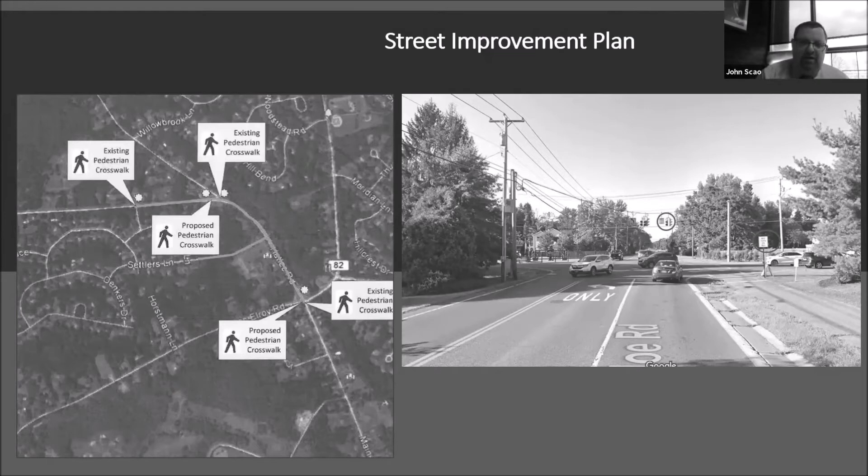This other image I want to show, because as a community—and many of the smaller communities have state or county routes going through their communities—I would encourage the CDTC linkage program for any community with a high visibility state or county route to look at a corridor study for opportunities to improve crosswalk, pedestrian, and bicycle safety. This is an example from when we did the Exit 9 corridor study, funded by CDTC.

We noted, and it was reinforced by our Highway Safety Committee, the needs of this intersection. The photo in the upper left shows that in 2007 we only had one crosswalk on the west side of Route 146 from Moe Road on the approach.

We were proposing a future sidewalk on the opposite side and crosswalks on both intersections, since there's a sidewalk that runs along Route 146. We also have funding for a new sidewalk on the north side of 146. At the time, we only had call buttons, and I don't think people realized these actually cycled the signal for them to cross. You have loop detectors in the pavement, but unless a car is there tripping the detector, it would never cycle through to allow a pedestrian to cross.

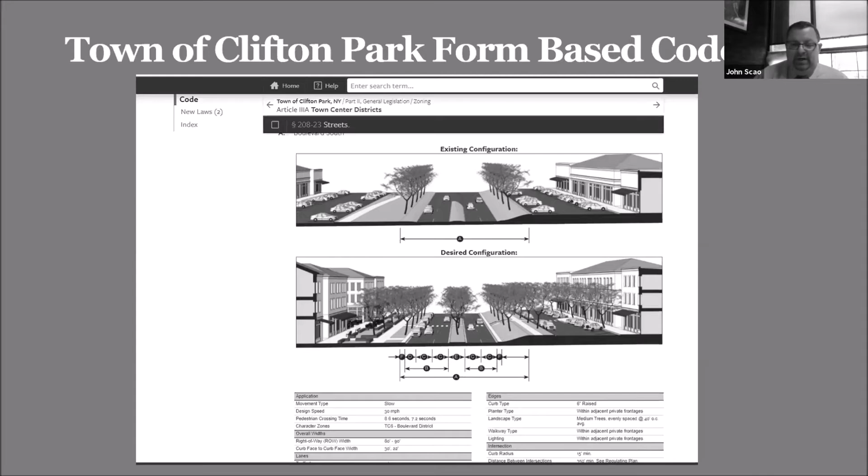This is an example of Clifton Park Center Road, Clifton Country Road South, with the street design elements right in our code. I'll show two examples of recent projects. This is a mixed-use building with 38 residential units and storefronts on the first floor. And here's a headline right out of the Gazette: ADA compliant sidewalks, crosswalks to be installed along a stretch of Clifton Country Road. This is while it was under construction.

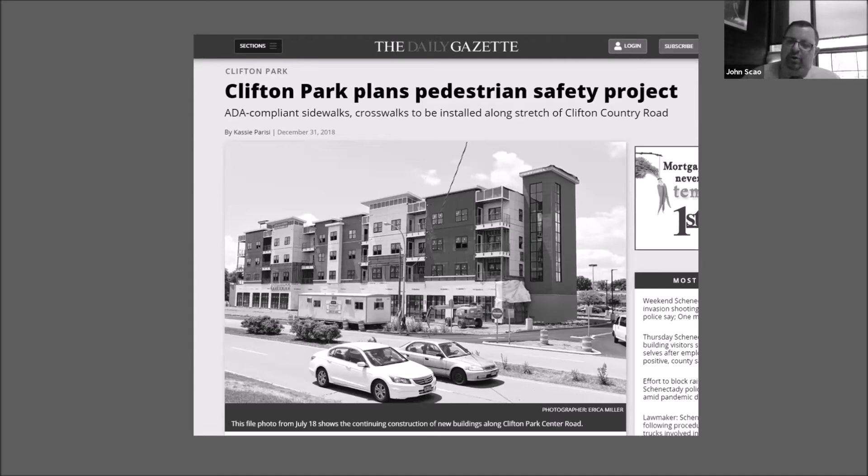That boulevard theme I just showed from our town code is this street section, and this is the finished product. Both businesses are open. This is new construction, and you can see how we connect it.

This is pre-COVID, showing the desire for outdoor dining areas, two sidewalks, and for the first time in Clifton Park, parallel on-street parking spaces that work very well. Many of these businesses now use the parallel parking spaces for curbside pickup, where you text that you've arrived and they bring the food out to you. When we planned this, it was never with the current situation in mind, but this area was able to adapt and transition well to the issues we're all facing.

Visible bike racks are something we require with every commercial project, placed in a visible location from the streetscape. Cyclists will start coming to these locations as part of a destination. I took this from the street view because it reminds drivers too, if it's in a visible location and not back behind the business, that there are cyclists and pedestrians in the corridor.

This is another project that just received approval two months ago in Clifton Park, similar to what was actually built. It should go to construction this winter, with additional parallel parking spaces and additional residential with commercial use on the first floor. It's an infill development project where there are three existing office buildings, 30-plus years old, that were set back. We're retrofitting with infill residential development on an existing commercial site.

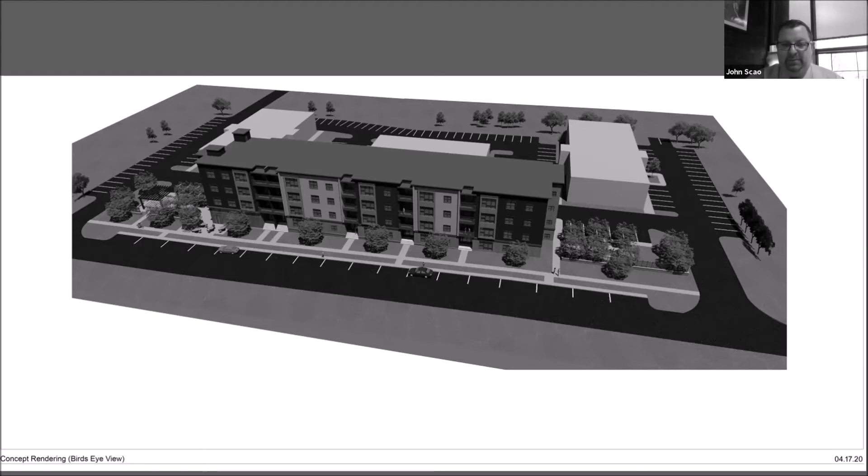It's not an all-or-nothing situation. People would say, well, you're infilling, but you're leaving three 30-plus-year-old buildings behind. It allows revenues to be generated that will allow for adaptive reuse of those commercial office buildings behind. Then when they become obsolete, redevelopment can occur over the next decade or two, in more compliance with our form-based code as time goes on. So these are incremental street-level changes.

This is a project currently in front of us, which will be back before our planning board on November 10th within our town center. This shows, on the private sector side, how we tie in commercial sidewalks into our street network and make connections to proposed restaurants. Here's a 12,000 square foot restaurant facility with 1.5 acres of outdoor dining being proposed right now. It's a great use that we think will complement our town center, and we're looking forward to working with the applicant to get this to construction in the near future.

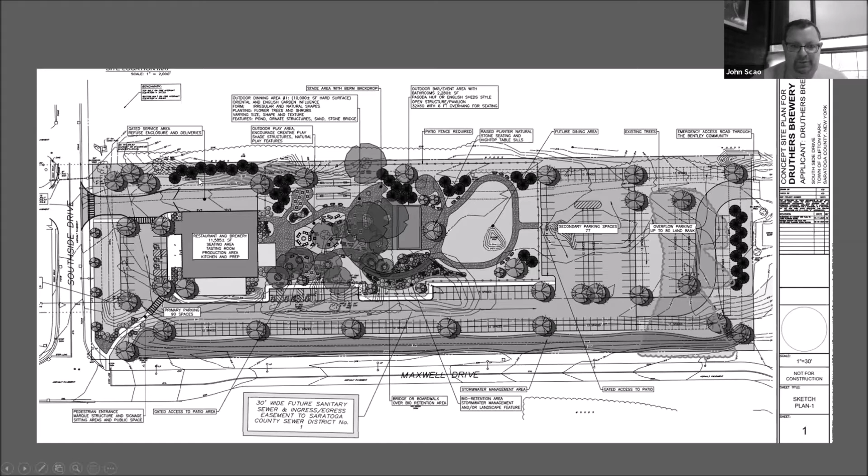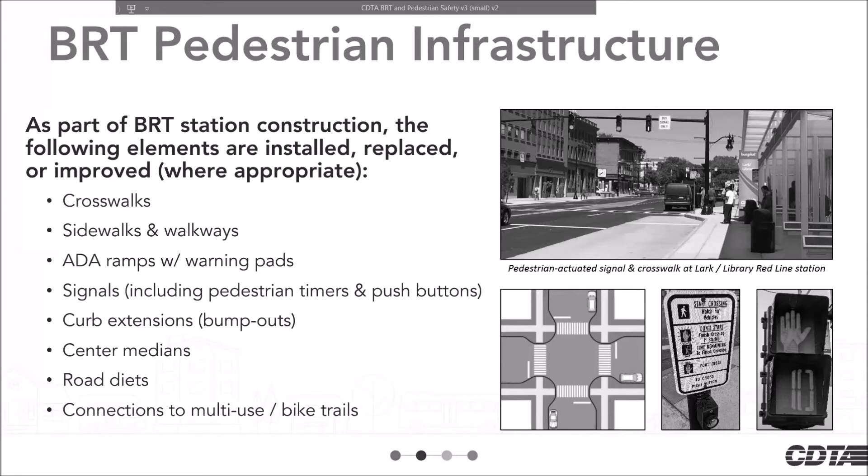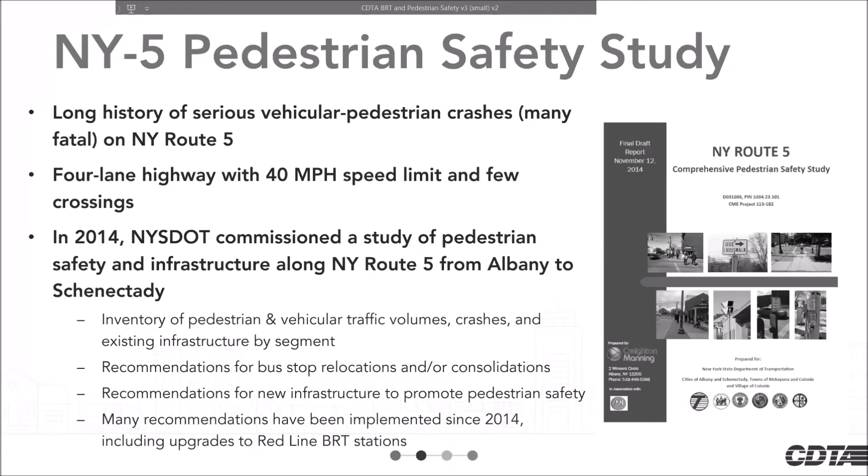One good example of the partnership from beginning to end is what happened with the New York 5 pedestrian safety study. CDTA was part of that study, a key stakeholder throughout its creation, and it came up with a number of different improvements that could happen on New York Route 5. For transit, some were as simple as moving bus stops that were mid-block at unsignalized intersections up to signalized intersections, but other things were more involved, and I'll give two examples.

The first was our major station next to Colonie Center. This is on the Red Line, a major location for ridership but also for transfers. There was a very difficult situation with a high volume roadway for traffic, also being the point where there were a number of pedestrians crossing the roadway.

So as part of the study, DOT actually constructed a center median, which restricted some turn movements but also provided the opportunity for pedestrians to cross the roadway two lanes at a time. If you're only paying attention to traffic in one direction without significant turning movements, and the roadway you're crossing is narrower, it becomes safer. So that's an example where the planning was done with CDTA, but the design and construction was done by another entity, in this case New York State DOT.

The next station is the Lark Library Station, constructed two summers ago. It's also on the Red Line, but will be a station for the future Purple Line. It had really the worst pedestrian safety record of any intersection on New York Route 5, I think actually in all of the capital region. This was also one of the busiest, and today is the number one busiest CDTA bus stop. A lot of that pedestrian traffic was being produced by CDTA bus routes, and not just the Red Line serves this location - there's about 10 other bus routes that serve this point.

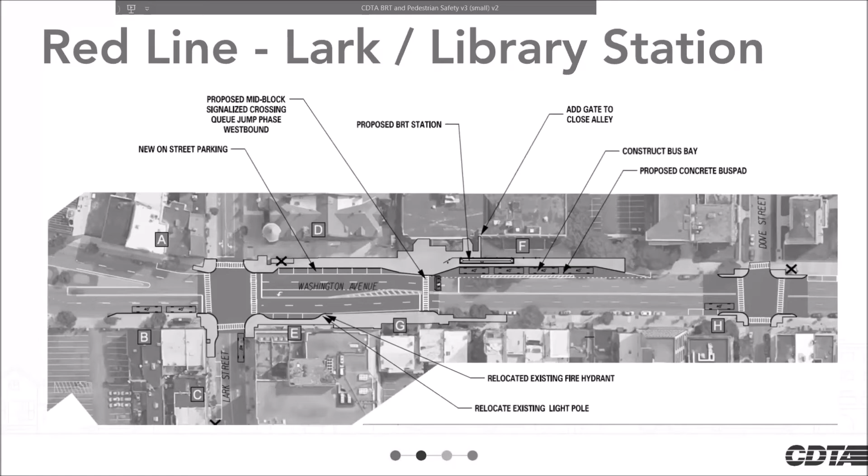As John was talking about in part of his presentation, that's when a vehicle is turning. So this has made a substantial improvement overall for the city as well as for CDTA riders. Through the consolidation of bus stops and these improvements, it is now the number one stop in our entire system. This is a project where, in reverse, CDTA was part of the planning, CDTA did the design, and CDTA did the actual construction.

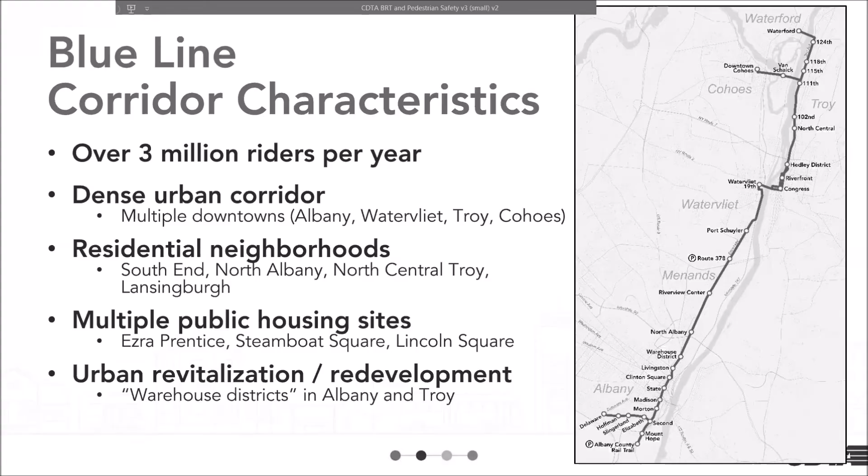The next line I'm going to go into is the most recent, the blue line, being built literally as we speak. It is our second BRT line, which will open November 8th. It's comprised of two routes, the 922 and 923, that overlap at the main trunk of the corridor from Lansingburgh down to the south end, but then with branches to Cohoes and Waterford, up 2nd Avenue and down to the Albany County Rail Trail.

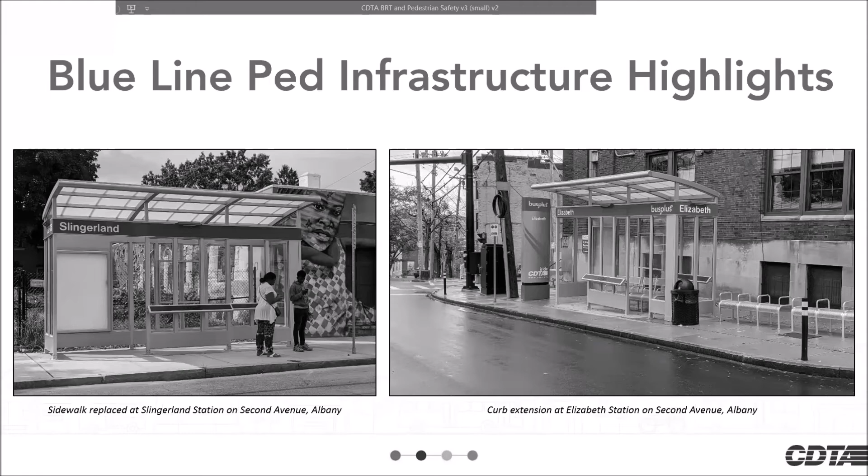These are some site shelters that were recently put in within the last month or two. The first part is the actual new shelter itself and the pylon, which is the identifier. But as you can see, especially in the picture on the right, we put in a bump out, a new sidewalk, street furniture, and as much as we can to improve the environment in areas with a limited amount of space.

Another example, this is a great one where we partnered with the City of Albany on design and construction of aspects of the South End connector, part of the Albany County Rail Trail. This is where you see the mix of a pedestrian crossing, BRT station, cycle track, and multi-use pathway all coming together at one point. Parts of this were built by the City of Albany, and parts are now being built in another location about a half-mile down by CDTA. The design was worked in partnership, and luckily we both had the same consultant, Creighton Manning Engineering, which makes design coordination a lot easier.

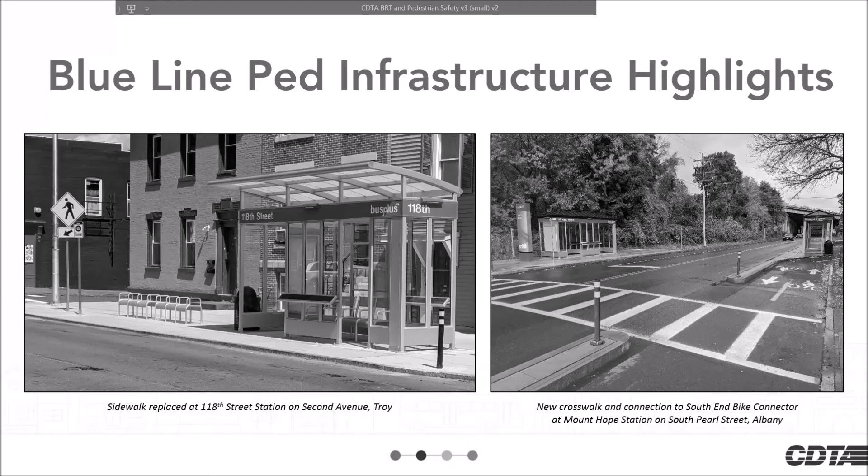Next, a project partially designed by CDTA, partially designed by a municipality, and constructed by a municipality: the City of Cohoes when they reconstructed Remsen Street. You can see the pad on both the left and right images. The city took a two-way street, made it one way, put in a number of street improvements, and actually constructed the bus pad and the bump out we use for our bus shelter. This is an older image — I think the shelter has been put in this week, or will be soon. This is a significant amount of infrastructure done by the City of Cohoes in coordination with CDTA.

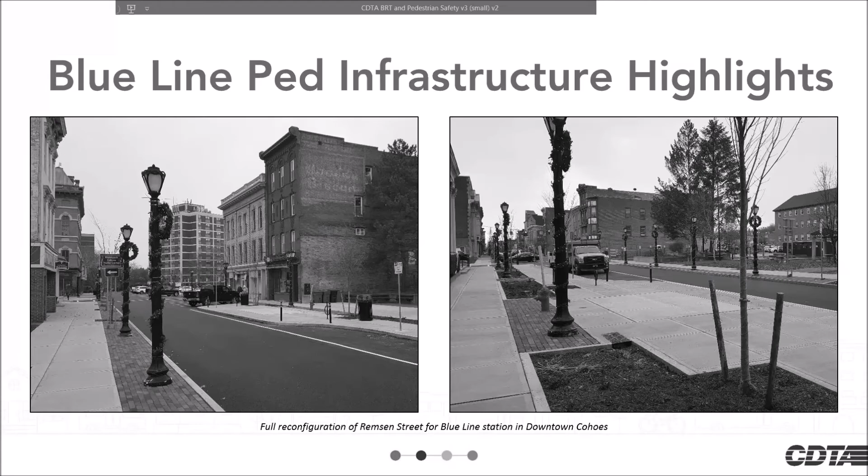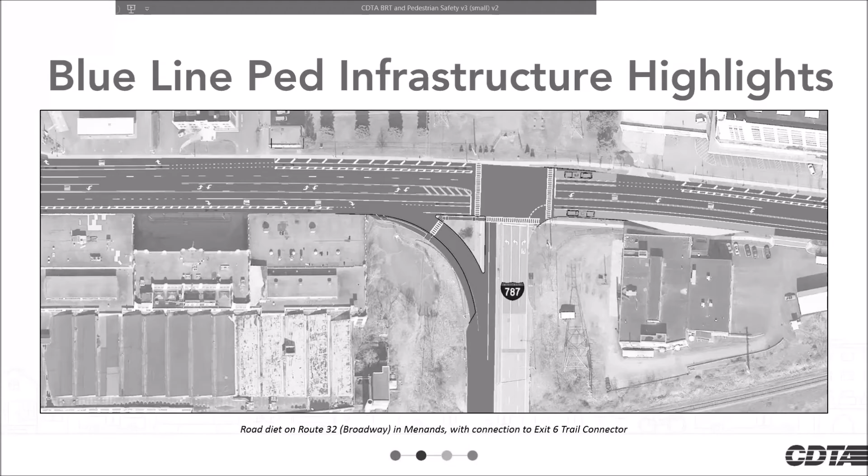So with that, I want to say thank you — thank you to Jen and John. CDTA is really in the infrastructure game more so than most other transit authorities or mid-sized transit authorities in the region. If any municipalities want to make improvements along a corridor with bus service, we definitely want to partner with you, because any benefit to a pedestrian is a benefit to transit. With that, I'll pass it back to you, Jen.